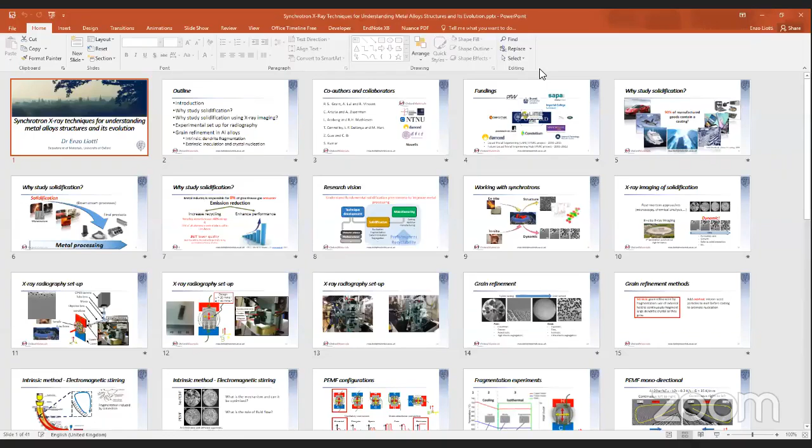In my presentation, I'm going to talk about the work we've been doing at Oxford using X-ray techniques to study metals, and in particular metal processing and the solidification of metal alloys.

I'll give you a bit of introduction about my background and the project, and also speak a bit about why we study solidification and why we use X-ray imaging to do that.

Then I'm going to move on and speak about the kind of experimental setup that we have developed to carry on these studies, and give you two case studies of the work we do, both on grain refinement of aluminium.

The first would be on what we call intrinsic grain refinement, which is dendrite fragmentation, and the second would be about extrinsic grain refinement, when you actually add seeds or a kind of nuclei to the liquid to get enhanced crystal nucleation.

The work I'm presenting has been done in collaboration with many people, and the main co-authors are Professor Patrick Grant, Andrew Liu, and Robin Vincent in my own department.

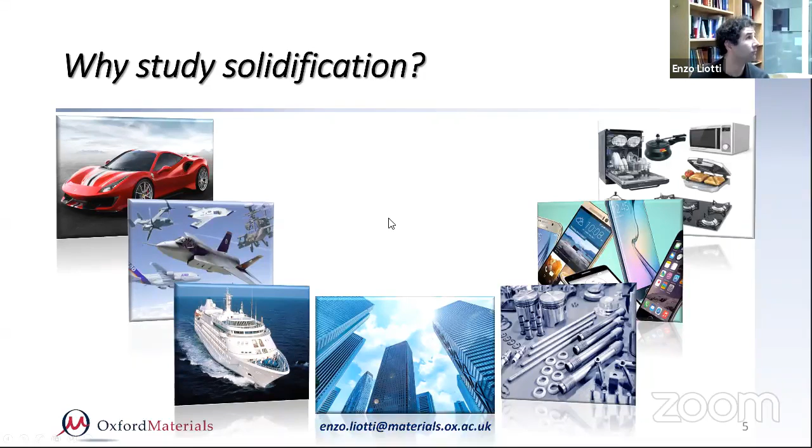So why do we study solidification? Well, if you look around you, any component or item you see probably includes at least one casting that has been produced through the solidification step. In fact, 90% of manufacturing goods contain at least one casting.

And also, if we look at the metal processing chain, we can see that solidification is almost always the first step of any component, and therefore the microstructure you obtain at the beginning will have a severe influence on the mechanical properties of the final product. So it's very important to get this right.

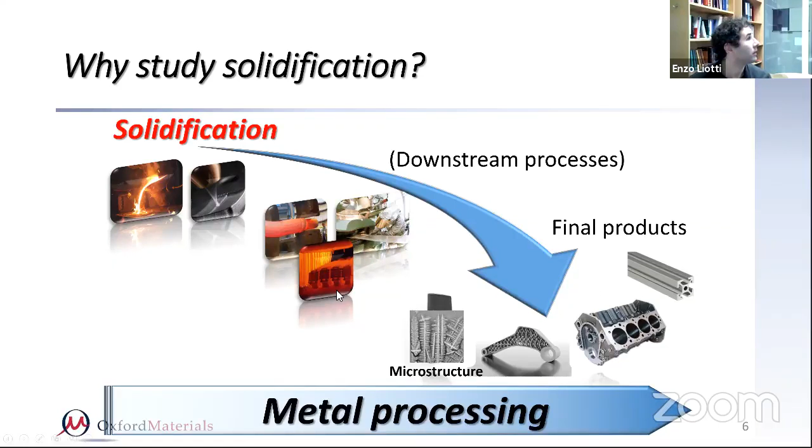The third reason why we study solidification is that if we look at emissions worldwide, the metal industry is responsible for 8% of greenhouse gas emissions. And to reduce this emission, we have to increase recyclability. This is quite interesting for metal alloys, because recycling aluminium saves 90% of the energy.

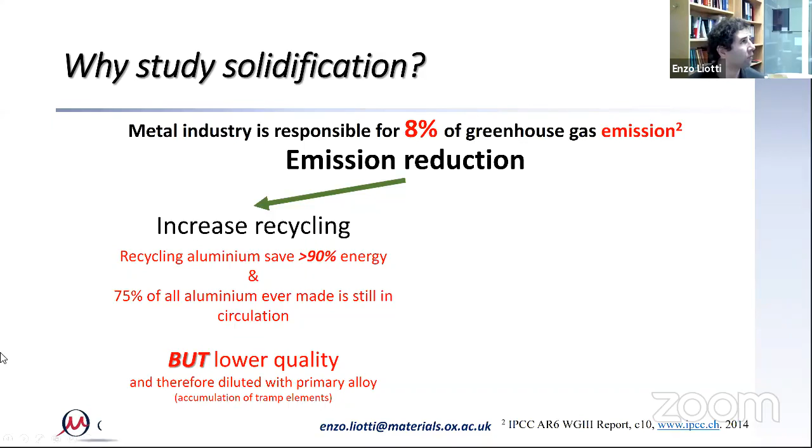That's not very big news. Also, 75% of the aluminium around is still in circulation. However, every time you go through the recycling cycle, the quality of the material decreases. Therefore, industry still dilutes secondary alloys with primary addition to bring back the quality to an acceptable standard. This has the disadvantage of needing to extract primary material to produce enough quality. So that's not a demand problem.

The second possibility is to enhance performance. Both of these criteria are heavily dependent on solidification. If you get a material with a very good microstructure with a lower level of defects at the beginning, then you will have better performance. And if you can control solidification wisely, you can probably reduce the need for diluting the alloy.

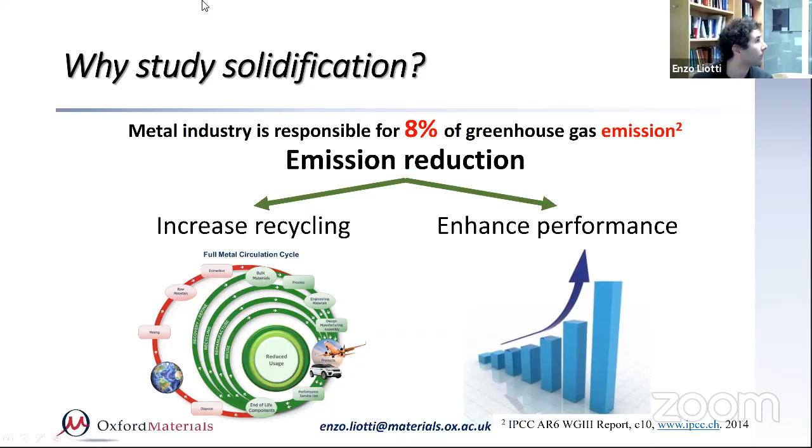So my research is focused on understanding the fundamental phenomena that take place during metal processing, to then enhance the quality of the material produced, and also learn how to control the microstructure to manipulate it to the needed requirement. I see my work as developing techniques that allow us to study solidification and improve manufacturing.

X-rays are very powerful tools for material scientists, especially for metallurgists. If we use a synchrotron, we can use X-rays to study the structure.

If we study the material ex situ, that's when you study the material at the final product. So for example, you do a casting and then you cross-section and look at the microstructure with microscopes. That's an ex situ experiment. So you do it after, right?

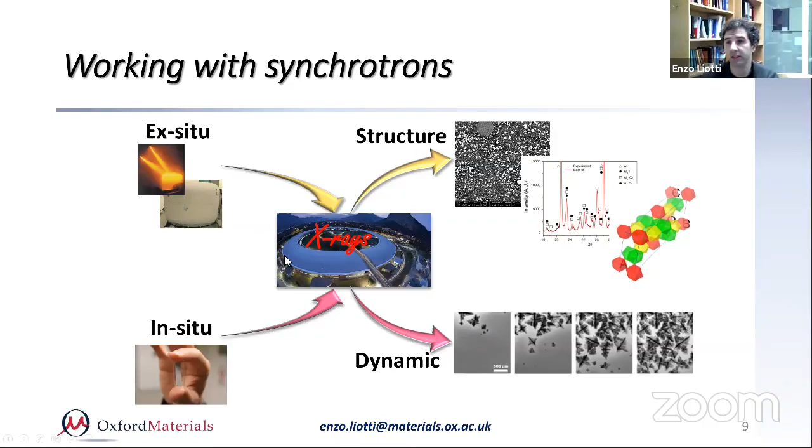When you're doing an in situ experiment, essentially it's when you're looking, for example, at a process while it's happening. That allows you to catch the dynamics of the process, which is very important, especially in very dynamic phenomena such as solidification.

Traditionally, metallurgy has been studied by post-mortem approaches. The typical case is what I just said: you take a sample, cross-section it, and look with an optical microscope or an SEM to see the microstructure. However, it doesn't actually tell you the entire story, because the microstructure you attain in dynamic processes is often the result of the process itself. So actually looking only at the final stage might not tell you the entire story.

Therefore, using in situ imaging with modern third generation synchrotrons, which are quite widespread nowadays on pretty much all continents, allows you to see the dynamics. By seeing the dynamics of solidification, you can learn about the nucleation and growth of the various phases, the solid-to-solid interaction, etc. It gives you a lot of information.

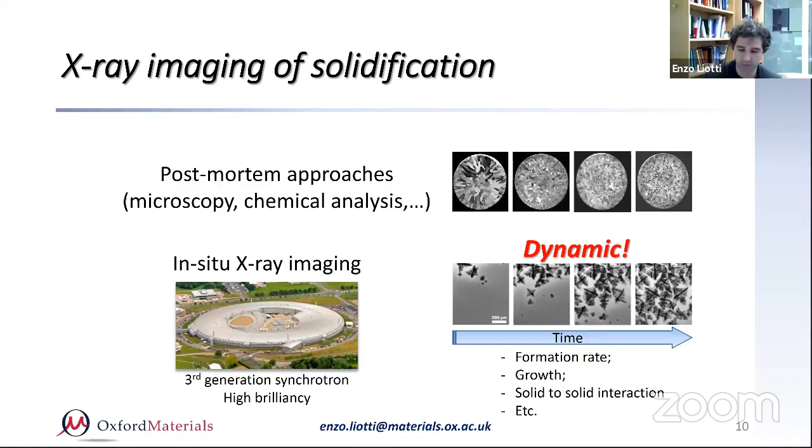So how does a normal radiography setup work? Normally you've got a sample, a very thin foil encapsulated in a container. In this case, it's a quartz-like cell, and then we put it in a furnace, which is a small Bridgman furnace.

A Bridgman furnace has two chambers that can be controlled independently. In this case, you see a heater on the top and a heater on the bottom, and they can be controlled independently. Because of that, we can impose an isothermal condition, or impose a thermal gradient and cool at a different cooling rate. By putting the sample in the middle, you can control the solidification.

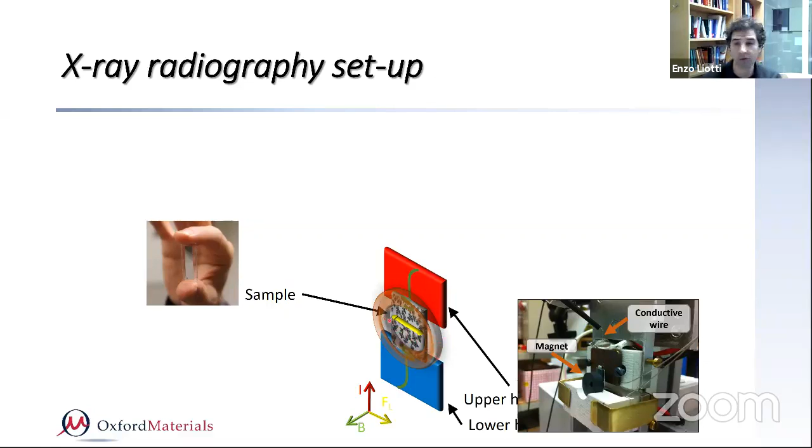Furthermore, our rig allows us to put a little electromagnetic stirrer that moves the liquid in the sample while imaging the formation of the dendrites or the solid. That's done by putting a small ring magnet and connecting two wires into the sample from the bottom to the top. By passing a current into the sample with the presence of a magnetic field, you can apply a Lorentz force, which is controlled by the type of electrical pulse you put in.

Then, as I said, you pass X-rays through your sample between the gaps in the two heaters, and you can collect the transmitted signal with an optical system at the synchrotron, which gives you an image that looks like this one. Okay, a few more details about the setup.

This is a detailed image of the sample. You can see the two wires here on the left, and the sample is covered by a coating, normally boron nitride spray powder, just to avoid contact with the silicon, which would basically dissolve the cell.

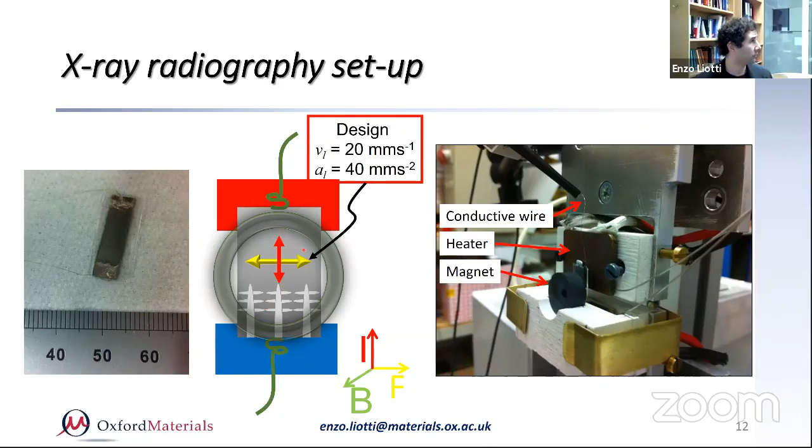Here is an example of how this little setup works. As I said, B is the magnetic field that passes through the sample. I is the current, which can be controlled because we use a pulse generator, so you can put different kinds of pulses in it. The yellow is the Lorentz force. In this case, if the magnetic field passes in the plane of the sample, perpendicular to us and coming out from the screen, and the current goes up and down in this direction, then the Lorentz force will be in the other direction.

These are a few examples of the rig setup during an experiment. In this case, the experiment was done horizontally, this was a thermal study, and this is a setup at the synchrotron.

As I said, the example I'm going to speak about is grain refinement. A typical casting has a coarse, columnar, anisotropic microstructure, and we retain normally high macrosegregation. That's what happens if you try to cast a component and don't do anything. Just pouring the liquid metal, the columnar microstructure tends to be favored.

What you really want to obtain naturally is a grain refined microstructure, so an equiaxed, fine, isotropic microstructure. We retain little macrosegregation, and it looks like this. This is the macro scale, and this is actually the small dendrite.

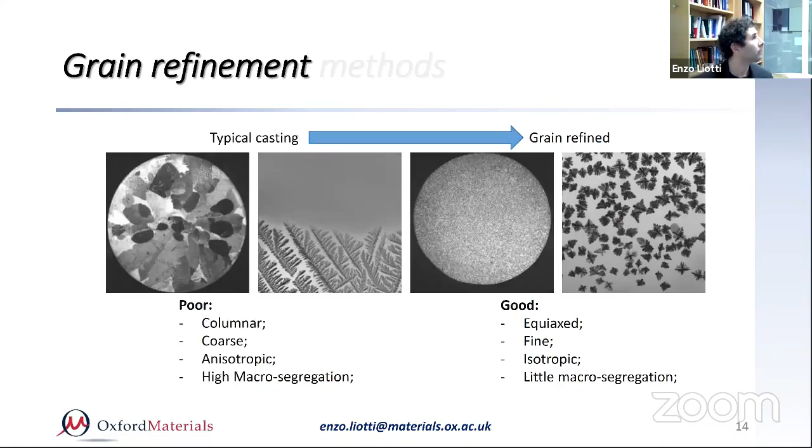To grain refine an alloy, you can use an intrinsic method, such as grain fragmentation. It's intrinsic because you're not adding anything to the material, but essentially using an external field to continuously disrupt the growth of the columnar dendritic array. That disruption and breaking of these arms generates new crystals as they grow and grain refines the material. The extrinsic method instead is when you add micron-sized particles to the melt to promote nucleation. A typical case in aluminum is the addition of TiB2.

The first example would be regarding intrinsic grain refinement. This method is already in place, for example, in continuous casting, where along the curve there are several electromagnetic stirrers, normally 2 or 3. If we look in detail, we can see that essentially the electromagnetic stirrer, whose primary goal is to homogenize the liquid and avoid or diminish macrosegregation.

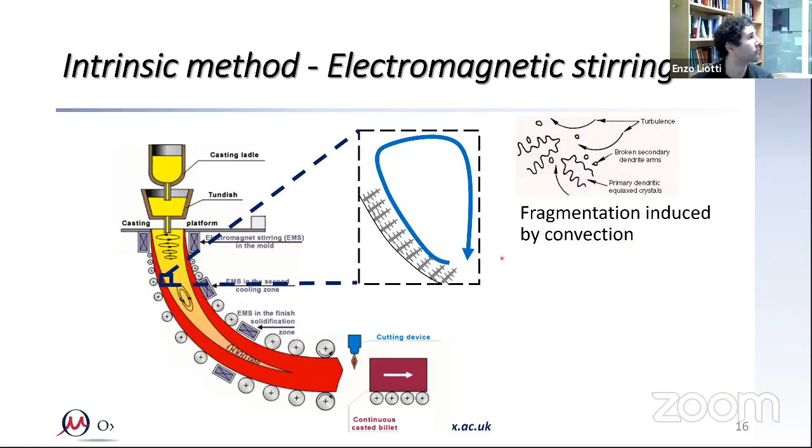But also the stirring leads to the fragmentation and breaking of the dendrite arms, promoting an equiaxed microstructure. This is an example of the effect of adding magnetic stirring to an iron and steel sample, and you can see with and without the PEMF in different conditions.

So it is known that if you stir the sample, you enhance the formation of an equiaxed microstructure, but what is the mechanism, and can it be optimized? What is the role of the fluid flow? Is it just mechanical breaking, or is there another mechanism? And can we exploit it more?

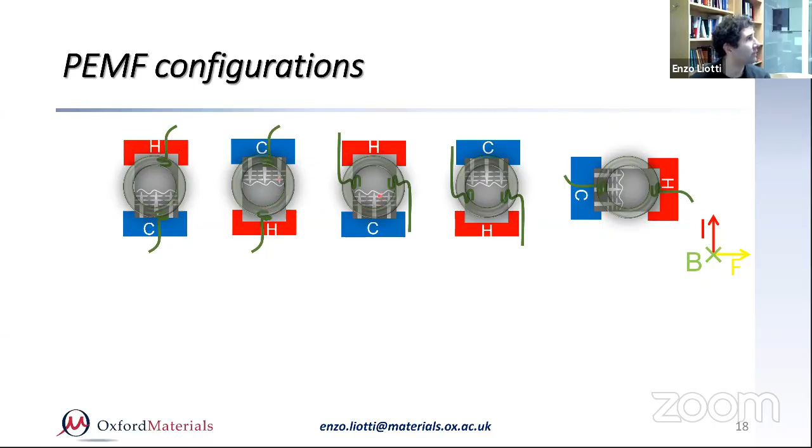With our little rig, which I showed before, we could essentially have several different setups. Because we can control the temperature of the two heaters, we can do solidification from bottom to top, or top to bottom. Also, by putting the wire in different locations, we can stir the liquid in different ways. If we put the wire at the top and bottom, we stir the liquid horizontally compared to the growth direction of the dendrites. Otherwise, we can put the wire on the left and right and stir vertically. We can also tilt the rig.

Also, the pulse can be oscillatory, like a sinusoid, square, or triangle, but can also be monodirectional, so always positive or always negative pulse, again with different shapes. So it's a very small setup that allows us to test many conditions.

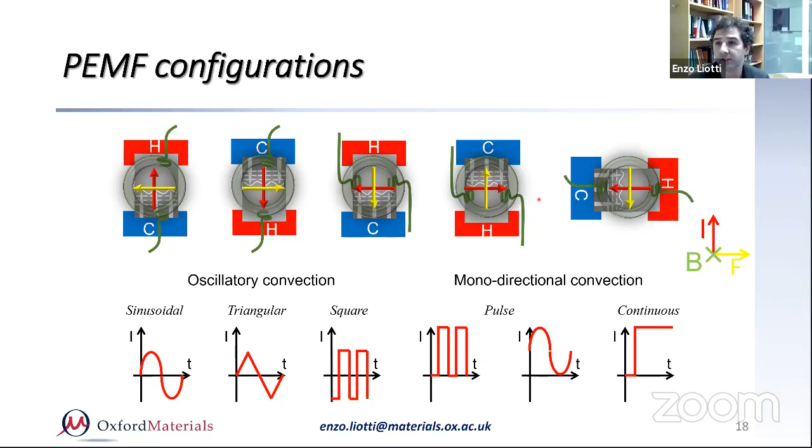The one I'm showing first is an example of a monodirectional, continuous, and sinusoidal oscillatory case. The type of experiment we were doing, which we call the fragmentation experiment, had this kind of setup, where we were cooling by imposing a thermal temperature gradient in the liquid. The material starts as liquid, then we cool at a constant cooling rate, with both heaters at the same cooling rate, until the dendrites were growing in the middle of the field of view, as you can see here. Then, at some point, when everything is steady, we switch on the electromagnetic stirrer.

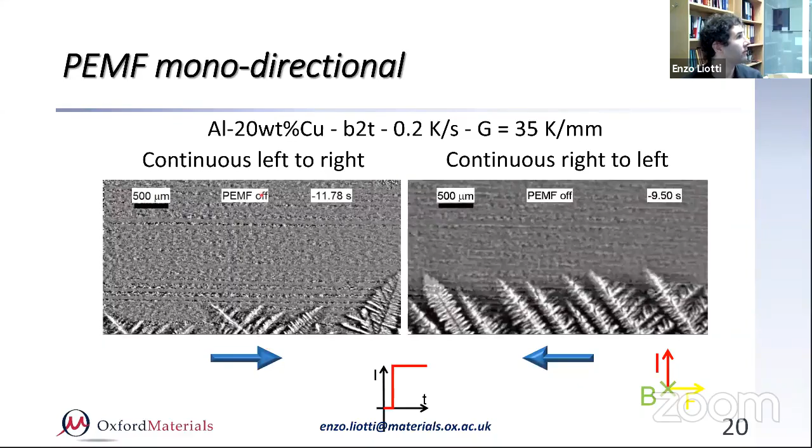So what you see here is an example of the growth of a columnar dendrite, where there is a continuous electromagnetic field. You see the dendrite growing, right? At some point the PEMF is still off, and at some point it will be turned on, and you will see that essentially this is pushing this direction, and you see it's remelting this direction, and here is remelting here, right? And this, in this case, because it's continuous, it's almost a steady state.

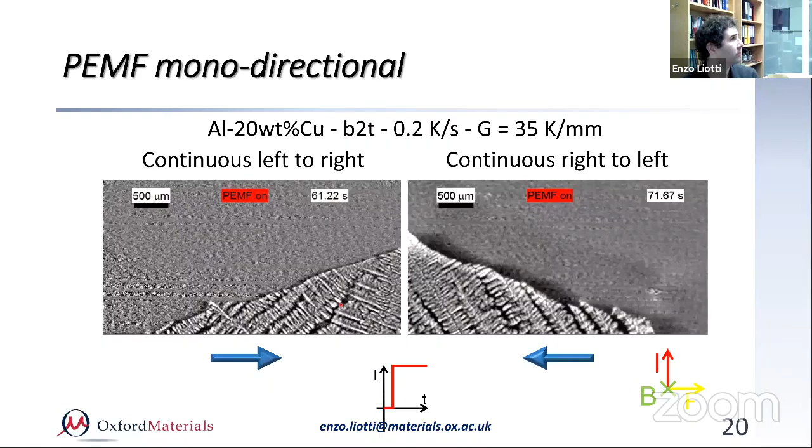The interesting thing is that you are remelting the top, but if you look carefully inside the mush zone, not much happens. So this condition, in essence, doesn't really lead to fragmentation. It just leads to a kind of steady state flow that makes the liquid recirculate and remelt the material.

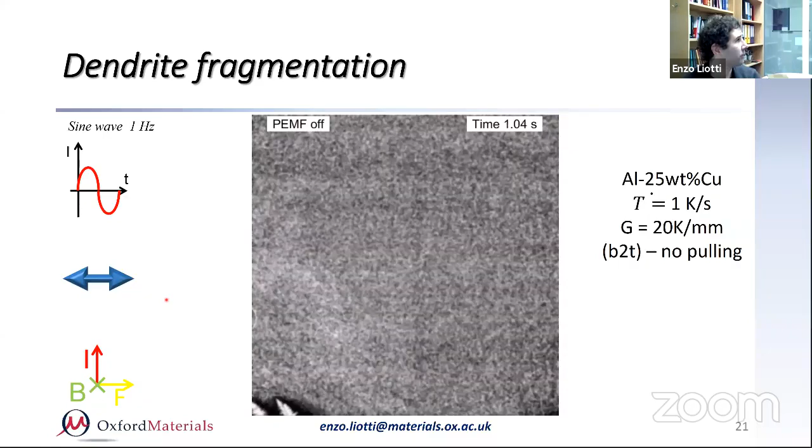This case instead is an oscillatory case. So what happened is the dendrites are growing, and here we are using a sine wave of 1 Hertz, which is positive and negative. So the liquid is steered left and right, and the dendritic array is growing. And if we go at time around 30 seconds, the PEMF will be turned on, and you will start to see fragmentation taking place.

It's about 32 seconds. This was grown like an aluminum copper alloy, and you can see, if you look carefully, we are steering the liquid. Clearly you don't see very well the liquid steering because you can't really see the flow, but you see the effect. So you see that there is a lot of secondary arms that are breaking.

And of course, in this case, because it's static, they just are basically stuck in the mush zone. But equally, they are breaking. So you can see, and if we speed up this process, I'll do it.

So you can see when it's like this, and they're moving with the flow. So it's a sinusoidal wave of 1 Hertz. So we are moving and steering the liquid on purpose. And you can see that it's taking primary, secondary arm, tertiary arm, breaking anything. And remember that in the mush zone you've got the liquid, and we are steering that liquid as well.

So we are here, and I sped it up so it's a bit more frequent. You can see that it's very noticeable, and you've got a lot of this breaking.

So we carried out a lot of experiments, more than 300 solidification experiments like the one we have shown you, with different kinds of setup, like bottom to top, with and without the EMF, top to bottom, and then one with vertical steering, and even horizontal solidification. But in the presentation of today, I'm focusing on the first four, so the bottom to top and the top to bottom case, with and without the presence of steering or electromagnetic steering.

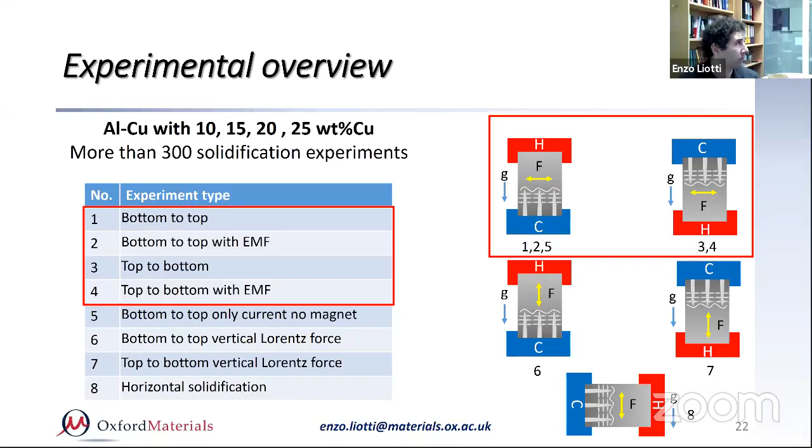So this is an example of the difference of the growth direction. So these are two arrays which are equivalent in everything apart from the direction. So when the PEMF starts, you can see that at some point there are, when you see the yellow, there is actually a breaking, right? And normally breaking doesn't take place immediately. It takes always a bit of time, about a few tenths of seconds. And you will see that when they start to basically fragment, there is normally more fragmentation in the bottom to top than in the top to bottom.

And if you can notice, actually, the top to bottom dendrites are almost oscillating with the flow. So there is a sine wave of 1 Hertz, as you see, and these dendrites are actually like if they were trees in the wind. Again, I'll speed it up a bit so it's a bit clearer. You see that the fragmentation is incrementing. And if I go fast, you can see there is a lot happening in the bottom to top, so the video on the right, and not very much in the other one.

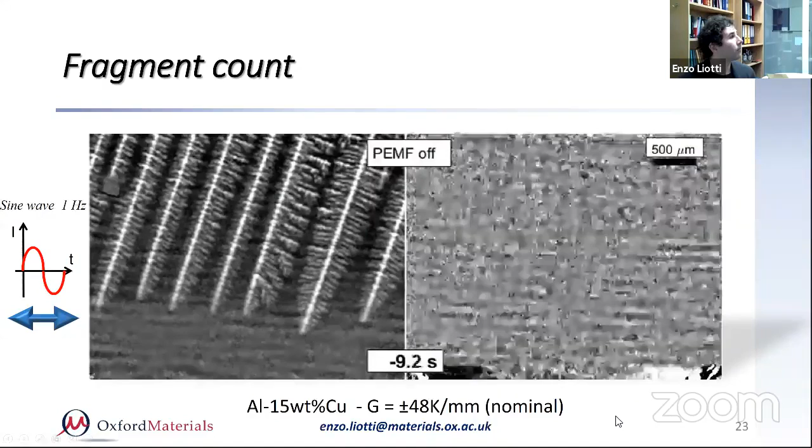Right. So what happened is this is actually the fragment count. So if divided in time steps of 30 seconds, right? And there was, this is on the left here, you find two videos, that is the top to bottom and the bottom to top.

And that's actually as time passed, so you should look at it horizontally like that. And you can see that the case at the bottom to top is significantly higher than the other case.

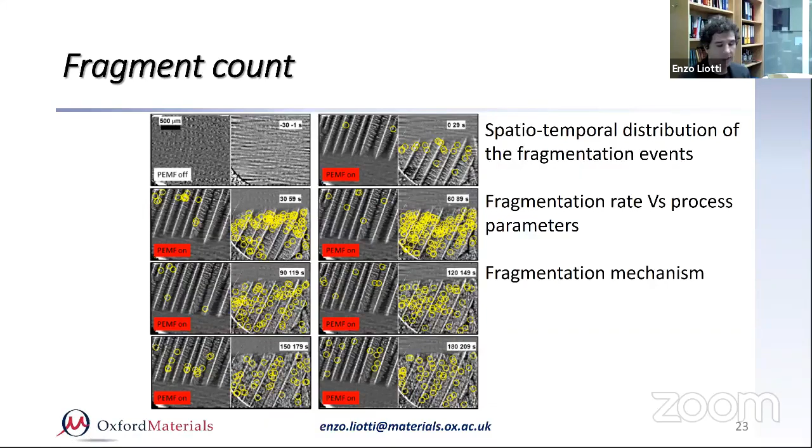In fact, the other interesting thing is the distribution of breaking events, the information we could learn about this, and the fragmentation rate against the processing parameter. What we were trying to achieve was to understand the fragmentation mechanism. By analyzing 39 video sequences and counting pretty much 8,000 fragmentation events, we were able to produce this curve, the fragmentation rate as a function of time for the various cases.

There are basically two reference cases for the bottom to top: the bottom to top where we're not doing anything, not steering, shown in green, and the red one, which is the bottom to top when we were steering, and then the same for the top to bottom. We used two different strengths of the magnetic field, so like more force.

If we compare the top to bottom with the bottom to top, this graph A shows the ratio of the fragmentation rate of the top to bottom compared to the bottom to top. We see that essentially solidifying the material with growth from the bottom to top was always favored. The fragmentation rate was higher at any time during the experiment.

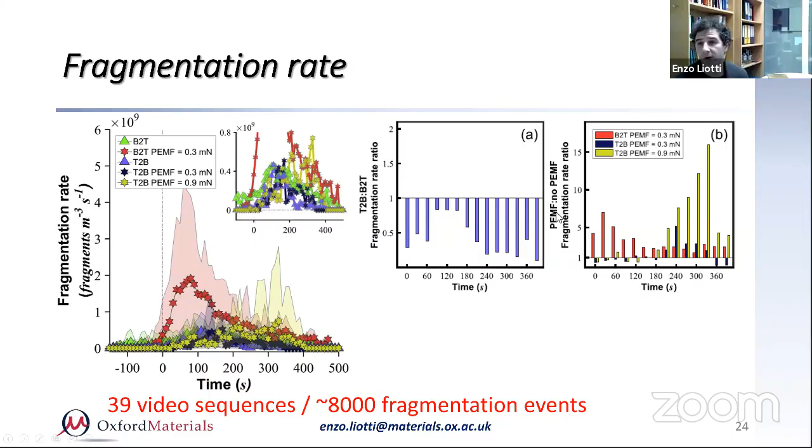While equally, every time we use a magnetic field, we obtain more fragmentation than without it. So the bottom to top is always higher than the top to bottom, and so it was when the electromagnetic steering was present compared to the case without.

The other thing that was interesting is the distribution of the fragments within the mushy zone. Somebody would expect that most of the fragmentation takes place at the tip, within the tip region. Actually, we found that there was almost a log normal distribution.

In all the experiments, fragmentation takes place more or less to a depth of a few hundred microns in. The peak is always the same, and that is independent from the top to bottom or bottom to top. So that tells us something about the mechanism.

Also, we started to look inside the mushy zone, at how the distribution of the solute gradient is. If the mushy zone is like this, the one in the image in the center, the solid fraction is 0 at the top and then will increase going down, right?

And we measure the solute gradient. So by looking at the images in the liquid and measuring the concentration of the liquid within the interdendritic channel, we were able to measure the solute gradient as expected.

The solid fraction increases, but also this horizontal gradient, which is actually represented by this color map, increases as you go deeper in the mushy zone, as shown here.

These are individual measurements of the solute gradient in the horizontal direction as a function of depth in the mushy zone. Here it shows the fragmentation of a primary dendrite, and you can see that the gradient was very high in the local area nearby the break.

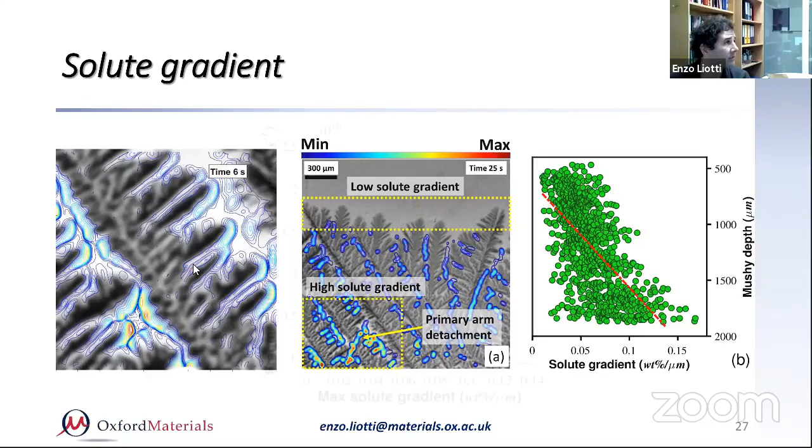So what this is telling us, well, when we started to look at and compare the fragmentation rate with the solute gradient, we found a correlation. This is important to understand the mechanism. So the higher the solute gradient within the liquid, the higher the fragmentation rate.

And the explanation we look at is this kind of mechanism. You need three fundamental key aspects to fragment a dendritic array. The first one is that you need a solute gradient. So if you are in an interdendritic channel, and this is a schematic of a primary and secondary arm, you've got some vulnerable regions, which are regions of high curvature, essentially the neck of the secondary dendrite where they are attached, and also primary kind of thinner areas.

And also you've got a solute gradient in the channel. So if the concentration of the solute would be flat, then even if you destabilize, if you move the liquid, nothing would really happen. If you've got just a little bit of concentration gradient, then the effect of destabilizing this vulnerable region would decrease.

But if you've got a steep concentration gradient, then the effect of a destabilization force, which could be our electromagnetic stirring, is increased, and therefore you've got more chances to break out.

This vulnerable region. So to summarize, what you need to enhance fragmentation is a growth condition that favors the formation of this vulnerable region, that favors the formation of high curvature areas. And also you need a destabilization force, and you need quite a steep solute gradient within the mushy zone.

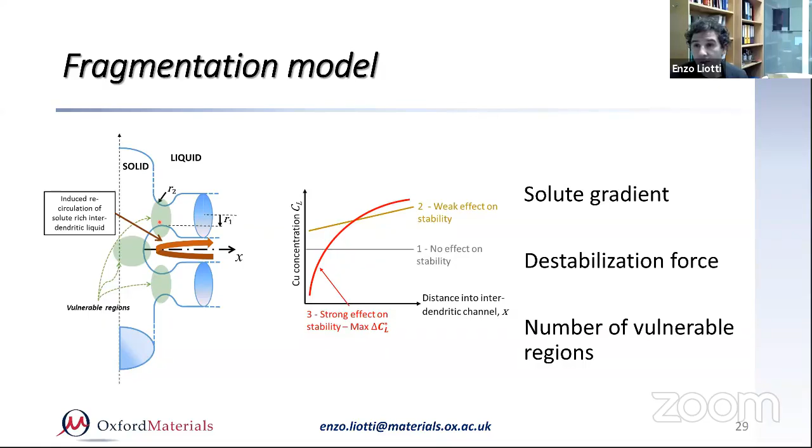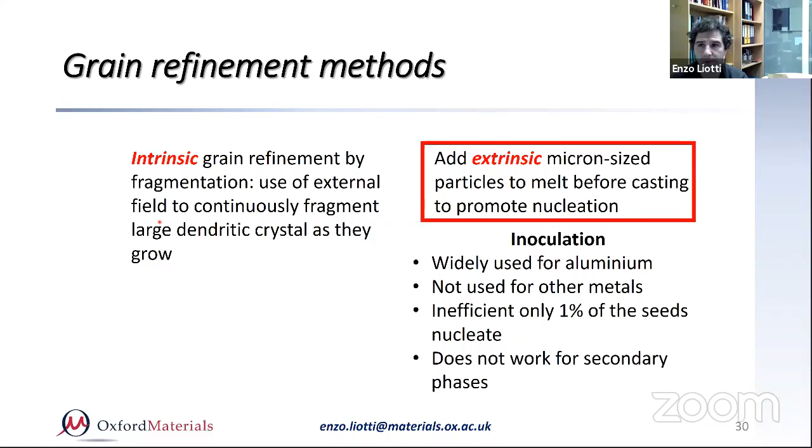So here is an example of nucleation of aluminum alloy from the liquid. What I'm going to show you is three video sequences of the solidification of an aluminum 20% copper, which was grain refined with TiB2. The difference in the three videos is just the cooling rate. So from the left is 0.3, and the one on the right goes up to 1.5 degrees a second. And these were solidified near isothermally with the two heaters kept at the same temperature and grow horizontally.

You can see that the grain forms, and the one on the right is faster, so they appear in the field of view much faster. But also qualitatively, you can see the solute segregation, in the mush zone, the darker blue color, compared to the bulk liquid. But one thing that's immediately visible is that despite the fact that it takes less time on the right side to solidify, just from the cooling rate, you can see that the nucleation was more copious. In fact, if we go towards the end of the video, you can see that the grain size, even by eye without any measurement, is much smaller on the right than on the left. That's kind of known: if you increase the cooling rate, you increase the nucleation rate, and you get a smaller grain size. So that's so far so good.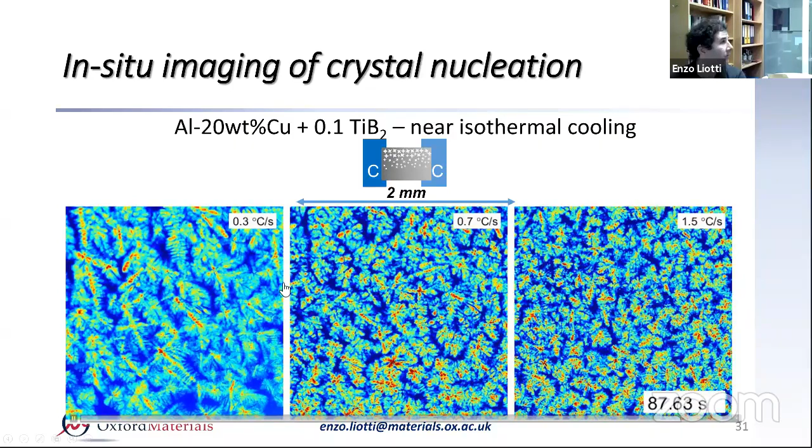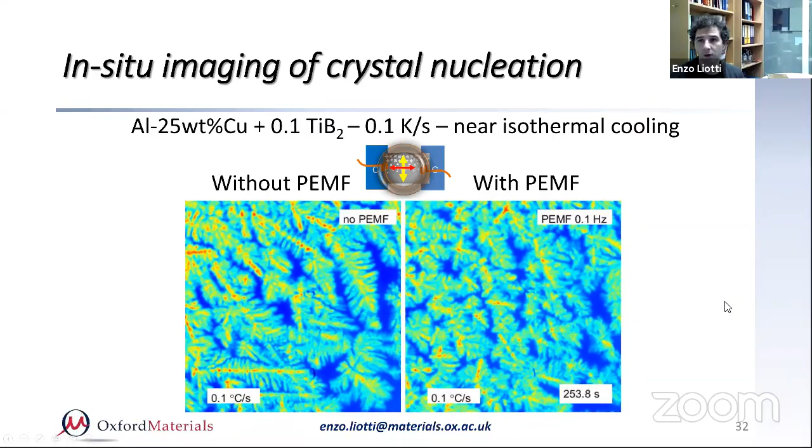Bear in mind that the PEMF is not always effective. It depends how it's applied. So in a complex casting, this situation will be much more chaotic.

Again, we've done many of these experiments. We spent 55 days at the Synchrotron, using different synchrotrons here in Europe, in Switzerland, in the UK, and in France. And we managed to collect 1,400 experiments, all on aluminum copper with different solute content, with and without the grain refiner, with and without stirring. And we covered a wide range of solidification conditions. That accounts for more than 50 terabytes of data, which is more than 10 million images. Most of these experiments were of very good high quality, like the video, like the image you see on the left.

You could actually get a lot of information out of it if you could analyze it. By counting the grain, you could estimate the formation rate and learn about the efficacy or potency of grain refiner particles. You could quantify the growth rate if you measure the elemental field in the liquid, since the experiment allows you to get a concentration of the solute in the liquid phase, and also get information about fluid and grain flow if you can track the grain. If we got all this information, we could compare it with nucleation and growth theory and test their validity, as a function of all the solidification parameters.

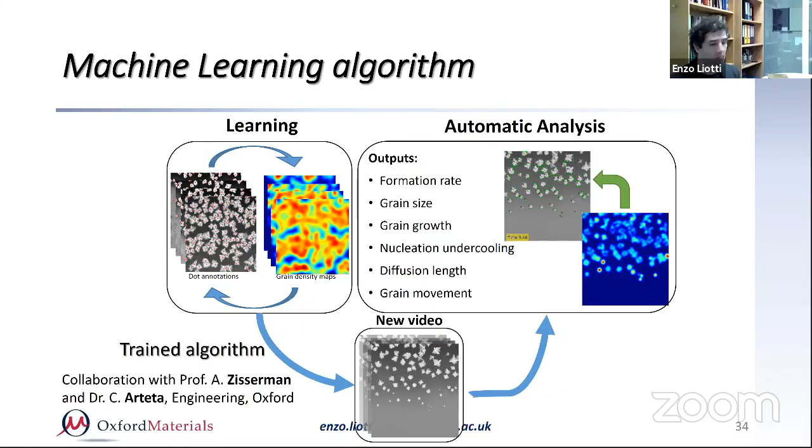And then we used that detection algorithm to attach a measurement algorithm. So once the grain was detected, another part of the algorithm automatically measured the grain size, formation rate, grain growth, nucleation undercooling, diffusion length, grain movement, and more. Here is an example of the algorithm at work.

You can see the dendrites are growing and it's detecting the velocity, so you can actually see movement and velocity. It's also detecting the grain as they form and tracking their growth.

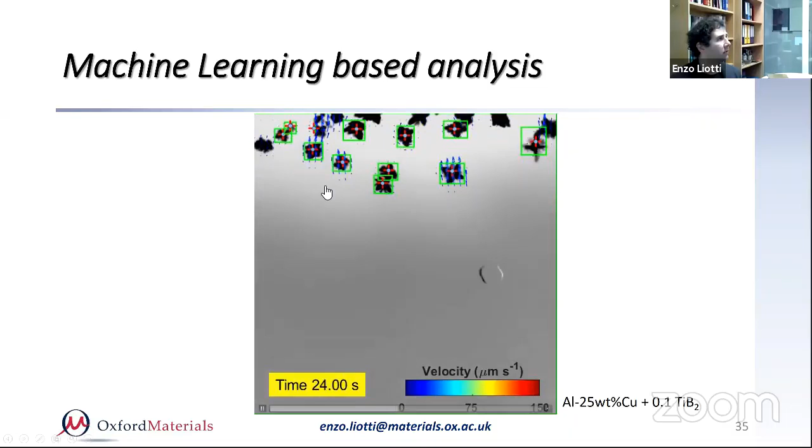This was done so far for 140 of the experiments we performed, out of 1,000 and something. You can see that they rotate and move. By measuring 128 video sequences, we were able to detect 14,000 separate nucleation events, each corresponding to an individual dendrite, an individual equiaxed grain.

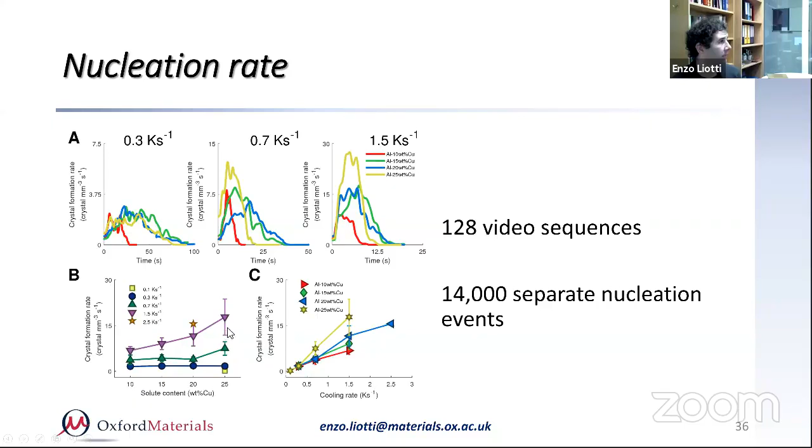That's also seen here in figure B, where you can see that essentially the effect of the cooling rate was much more effective at high solute content compared to low solute content.

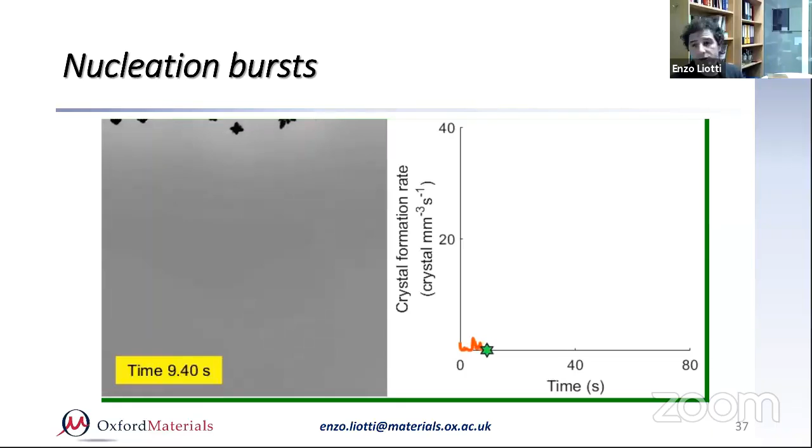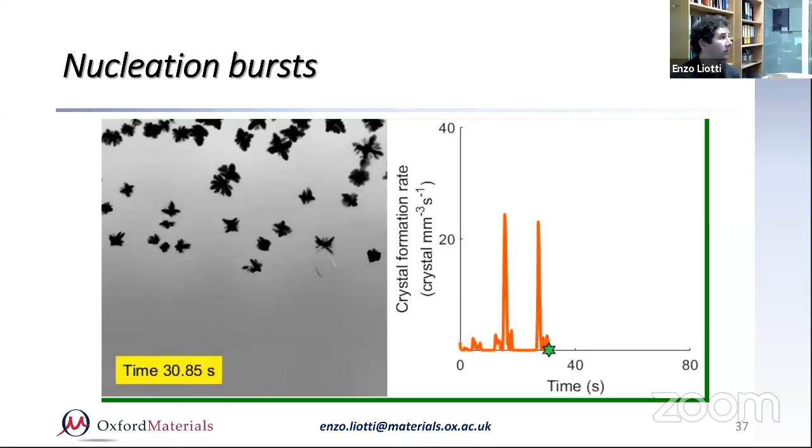Another interesting aspect found by analyzing all this data, which I had always theorized, is that nucleation in a temperature gradient doesn't take place continuously, but actually comes in bursts. As you can see here, this is a live graph of the formation rate of the crystals, and within the video there were essentially 2 big waves. So nucleation is not continuous, it's almost like recharging, and then there will be a final wave taking place now.

This was crucial to understand the way in which nucleation takes place and how it might be controlled. In fact, by looking at the video, we were able to correlate the frequency and intensity of these waves to the concentration of the solute.

So when we have more solute, essentially these bursts are more frequent, so they take place at a higher frequency and they are more intense. The effect of solute is that when you have a low solute content, nucleation is almost continuous, happening infrequently and slowly. But the more solute you put in, you favor the formation of a solid suppressed zone, and therefore when nucleation takes place, it happens in the form of a wave, a burst.

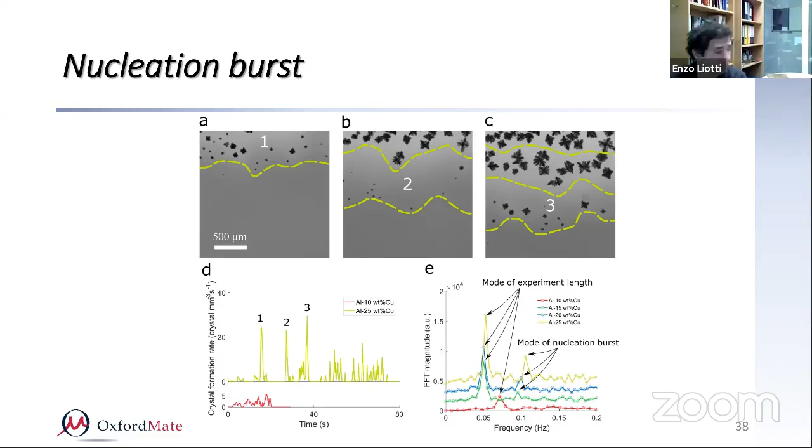This was explained by looking at the effect of solute suppression. Solute suppression is a concept showing that by increasing the solute content, you increase the size of the solute suppressed zone, which takes place because of partitioning.

When a solid forms, it will segregate. In the case of a hypoeutectic aluminum alloy, it will segregate solute into the liquid. In a hypereutectic alloy, it's the same, depleting the liquid of solute. The blue area you create is a zone where nucleation cannot take place because it's been suppressed by the solute rejected by the solid crystal.

If this area is large compared to the overall undercooled area, then when nucleation takes place, it happens at higher undercooling. The schematic shows that you're able to activate more grains when you suppress more solid, because you suppress the easy-to-nucleate grains that would otherwise kill the nucleation of higher undercooled seeds.

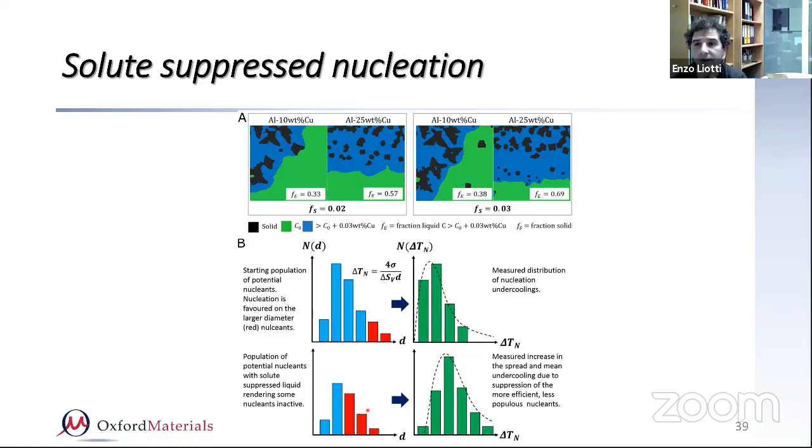With this, I conclude my talk. The takeaway is that X-ray imaging can give you the dynamics of the phenomena, which is key to understanding fundamental phenomena during solidification, or any other dynamic processing phenomena. It has become an almost indispensable tool for studying solidification, as shown by the increasing number of studies of this type published in the literature.

And that's also because the number of synchrotrons offering an imaging beamline is increasing, so more people have access to these tools.

These techniques have given new insight in science, especially new types of data that weren't available otherwise. The bursts of nucleation were hypothesized back in the early 2000s, but this was the first direct evidence that they existed.

The interesting thing is that it's now relatively straightforward to do this experiment, but it needs automated analysis to be fully exploited, especially machine learning, because of the sheer size of the dataset created. It's unthinkable to approach manually.

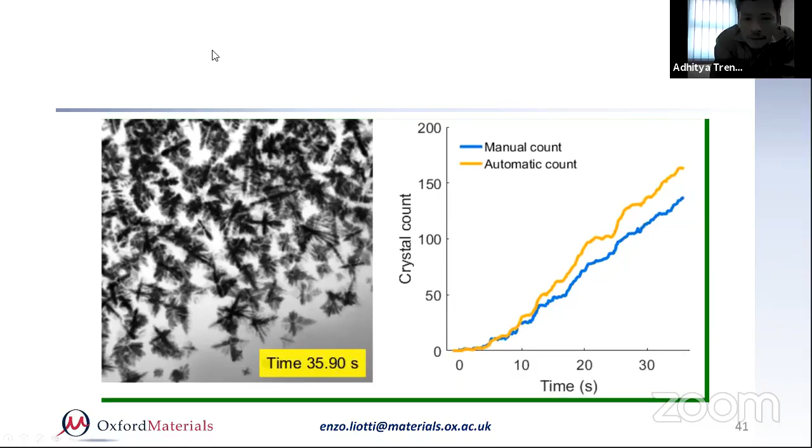Before we close this first session, I want to ask Dr. Enzo, do you know Mika Filipa from Portugal? No, I never met him. Yeah, nice to meet you. Okay, so because I checked your Facebook and you are friends with Mika Filipa from Aveiro, Portugal. Oh yeah, yes, I know her. She's my friend because I got my master's degree at Aveiro University. Really? The world is very small. Yeah, Mika used to be my housemate for a long time, in Oxford. That's a very small world. Yeah, that's very interesting.

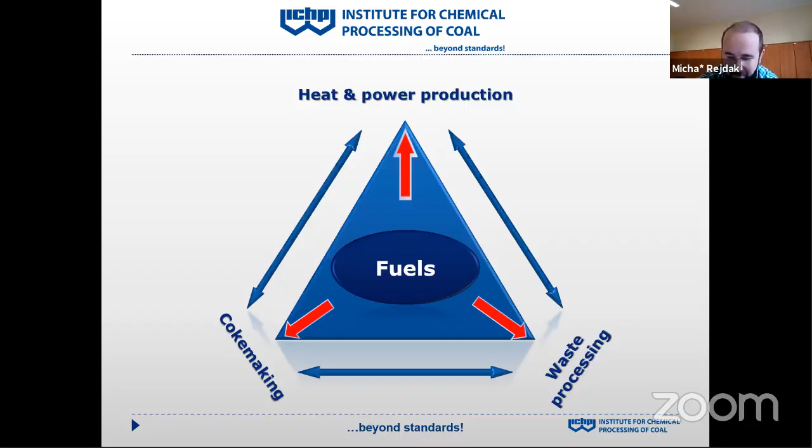Okay, so hello once again, good afternoon ladies and gentlemen. First of all, I would like to thank Sultan Ageng Tirtayasa University for the possibility of making this presentation. My name is Michal Rejdak, and I am an employee of the Institute for Chemical Processing of Coal. Our headquarters is located in Zabrze, in the Silesia district of Poland. We are a research institute focused on development of technology related to coke making, power production, and waste processing. Today, I have the pleasure of giving a lecture entitled Cokemaking Technologies, in which I'll try to present matters related to the technology of coke production, which is an important raw material for the development of the world economy. There is an agenda for the presentation.

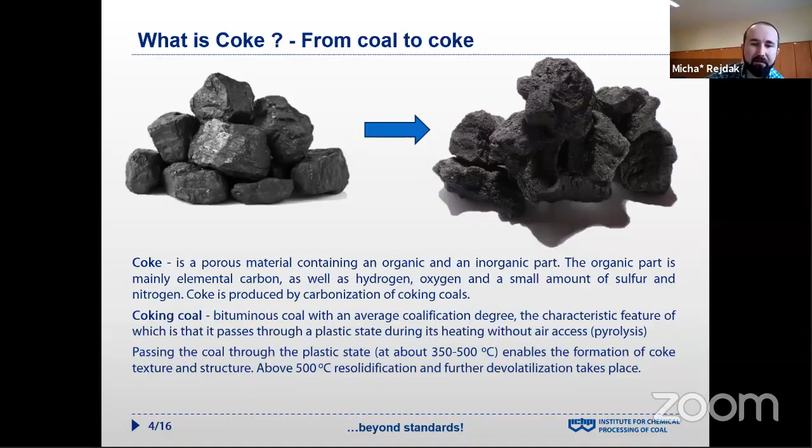In general, I will try in a brief way to approach the process of coke production. What is coke? In general, coke is a porous material containing an organic and inorganic part. The organic part is mainly elemental carbon and also hydrogen, oxygen, and a small amount of sulfur and nitrogen. Generally, coke is produced by carbonization of coking coals in coke oven batteries. What is coking coal? Coking coal is a kind of coal, a bituminous coal with an average coalification degree, and the characteristic feature is that it passes through a plastic state during its heating without air access.

It's called the pyrolysis process, and passing the coal through the plastic state occurs at about 350 to 500 degrees Celsius, which enables the formation of coke texture and structure. Above this temperature, in general, resolidification and further devolatilization takes place. There are generally three main types of coke produced: blast furnace coke, the production of which accounts for over 90% of global production; foundry coke, used for iron and steel foundry, casting of non-ferrous metals, and manufacture of insulation products like mineral wool; and heating coke, used for heating purposes as a smokeless fuel.

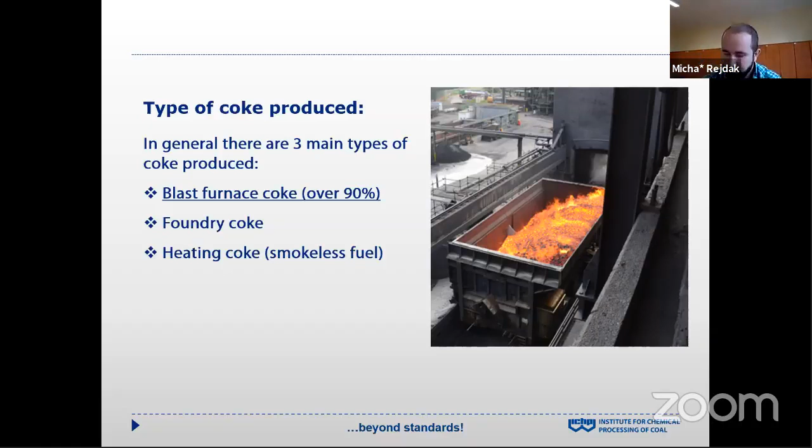As you probably expect, the largest coke producer is China, which produces over 400 million tons of coke annually. Other largest producers are Japan, about 30 million tons of coke per year; Russia, more than 28 million tons of coke per year; and India, just over 20 million tons of coke per year. In the European Union, the largest producers are Poland and Germany, with production of approximately 9.5 million tons of coke per year.

The production of coke is closely related to the production of steel, the basic raw material necessary for the development of any economy. Steel is used in the construction industry, automotive industry, household appliances, and many others. It is currently the basic construction material.

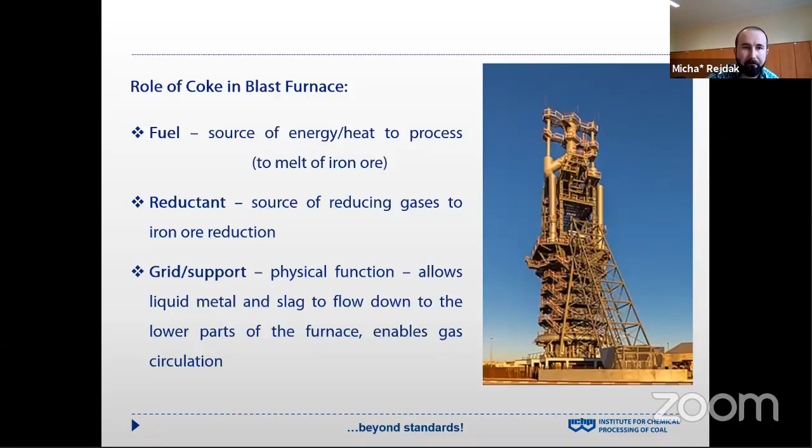Gases generated during the process remain in counter-current to the downward sliding column of materials. At the bottom of blast furnaces there are hot blast nozzles. The oxygen in the air, on contact with the coke, generates carbon dioxide.

Then the carbon dioxide, on contact with the hot coke, produces carbon monoxide. In the Boudouard reaction, the carbon monoxide produced this way is the main reducing gas for the reduction of iron-bearing ores to liquid iron.

Due to the difference in density, because apart from iron, some slag is being created during the blast furnace process, the liquid iron flows to the bottom of the furnace, while the slag is on its surface, from where it is drained out.

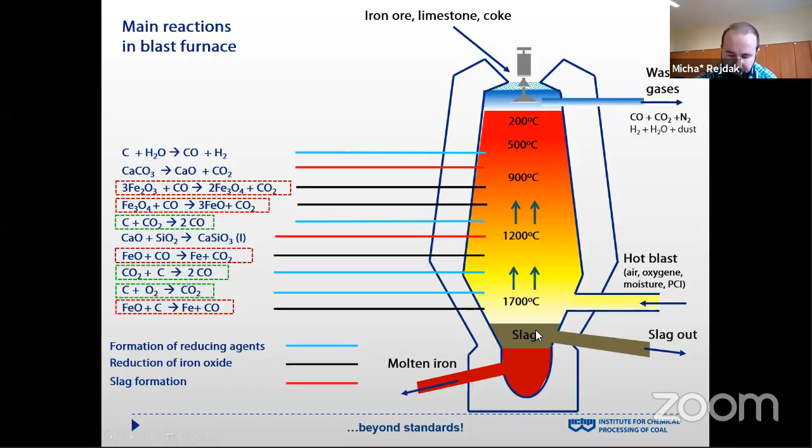In modern blast furnaces, in addition to coke, alternative fuels such as pulverized coal or natural gas are used as a heat source. Moreover, modern furnaces are taller and have a greater working volume, related to the higher mass of input material. Therefore, the physical role of coke is increasing in importance - that is, providing a grid for the columns of material and the gas permeability of the bed.

In several previous slides I tried to show how important coke is in the production of steel. In the following, I'll try to present the method of producing coke in the coke-making industry.

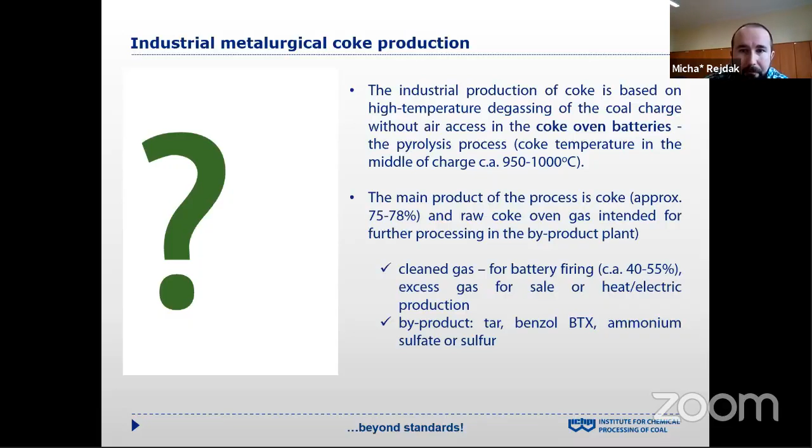The industrial production of coke is based on high temperature degassing of the coal charge without air access in coke oven batteries - it's called the pyrolysis process. Coke temperature in the middle of the charge, in the middle of the oven, is between 950 and 1000 degrees Celsius. The main product of the process is coke.

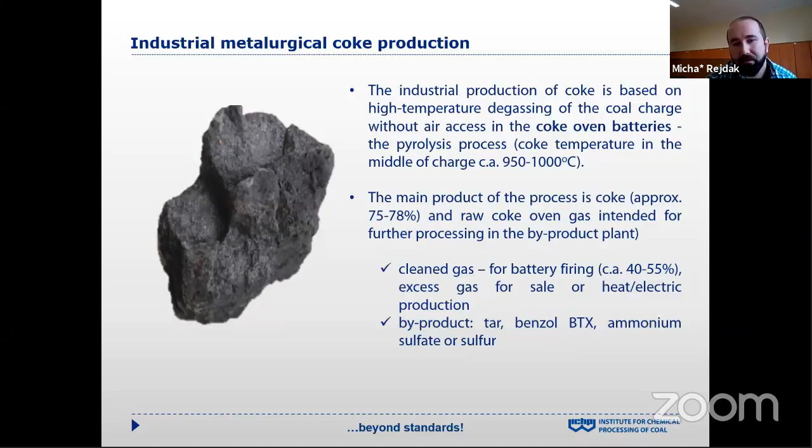Coke makes up approximately between 75 and 78%, and raw coke oven gas, which is intended for further processing in a byproduct plant, is used to obtain cleaned gas for battery firing - about 40 to 55% of cleaned gas is used for battery heating, and the excess gas can be sold or used for electricity production. Apart from coke, we have byproducts like tar, benzol - which contains benzene, toluene, or xylene - ammonium sulfate, or sulfur.

We can generally distinguish two types of industrial coke production technology: coke production in batteries with or without recovery of byproduct, so-called non-recovery or heat recovery batteries.

Depending on the methods of loading the coal charge into the battery, each of these technologies is divided into two: top, sometimes called gravity charged, and stamp charged technology. The main difference between the two is the recovery of byproduct from raw coke oven gas. In byproduct coke making, the raw coke oven gas passes through the process system to recover a number of valuable chemical products. But in non-recovery or heat recovery, the gas is only used to heat the battery and produce heat or electricity.

In the case of a gravity charged battery, the coal blend is gravity charged into the coking chamber from the top of the battery through the charging holes located in the battery roof. In the case of a stamp charged battery, the coal charge is first compacted in a steel box by a row of stampers, and in the form of a stamped coal cake, it is pushed into the oven chamber through the oven door, which is located on the machine side of the coke oven battery.

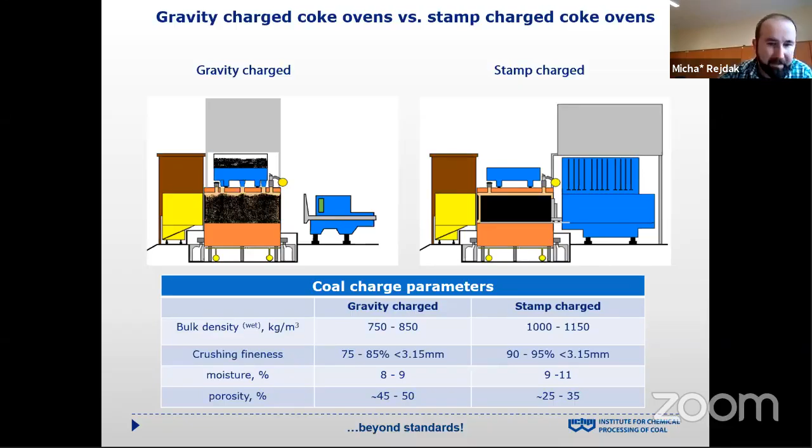We can observe that in both cases we obtain different parameters of the coal charge for coking. Thanks to the stamping process, we obtain a much higher bulk density of coal charge, which enables the production of better quality coke, or production of coke of the same quality but with use of weaker and cheaper coals in the coking blend, sometimes even non-coking coals. But the use of stamp charge technology requires deeper grinding and higher moisture content of the coals to ensure proper stability and mechanical strength of the prepared coal cake.

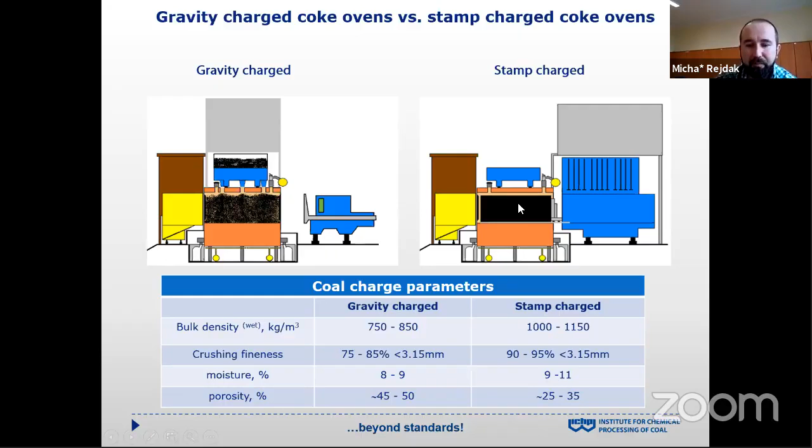What is the advantage of stamp charging? As I said before, the higher bulk density of coal charge enables production of coke with higher coke strength after reaction index and lower abrasive index. I mentioned lower cost of coking blends, and of course higher density is related to higher oven throughput. But about the coking quality parameters, I will say in the next slides.

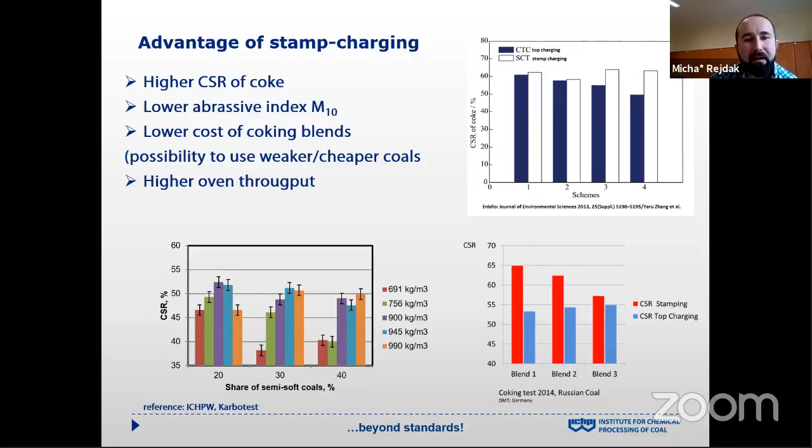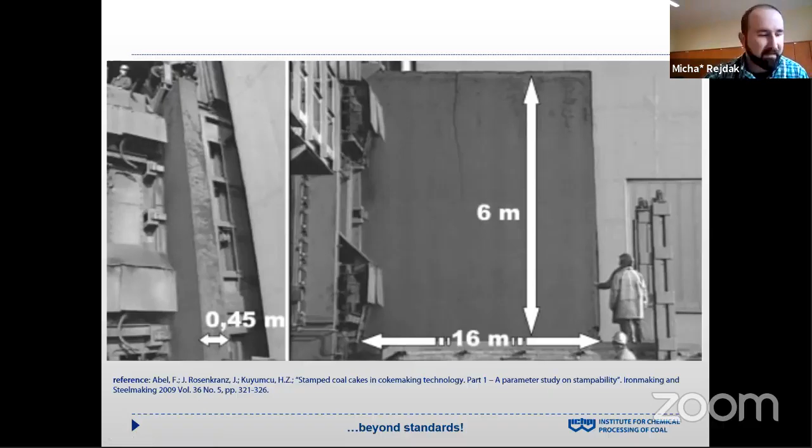In the next photo, we can see the stamped coal cake. As we can see, the height of the cake is about 6 meters, the width of the cake is 45 centimeters, and the length of the stamped coal cake is 16 meters.

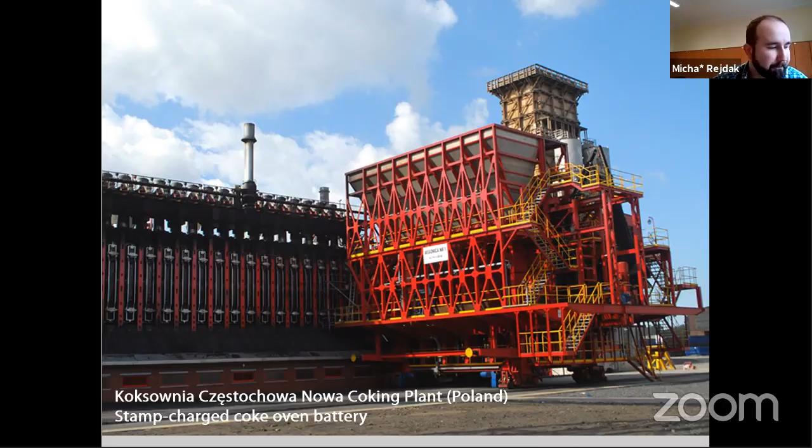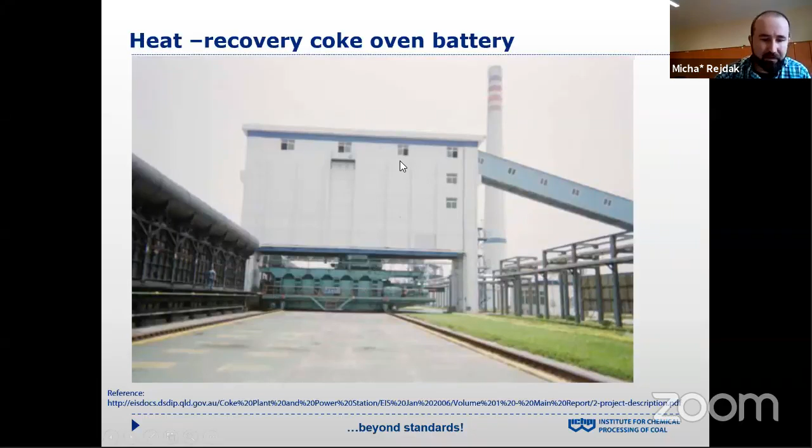Here we can see the photo. There are heat recovery ovens under construction. So this is the internal chamber of the heat recovery coke oven.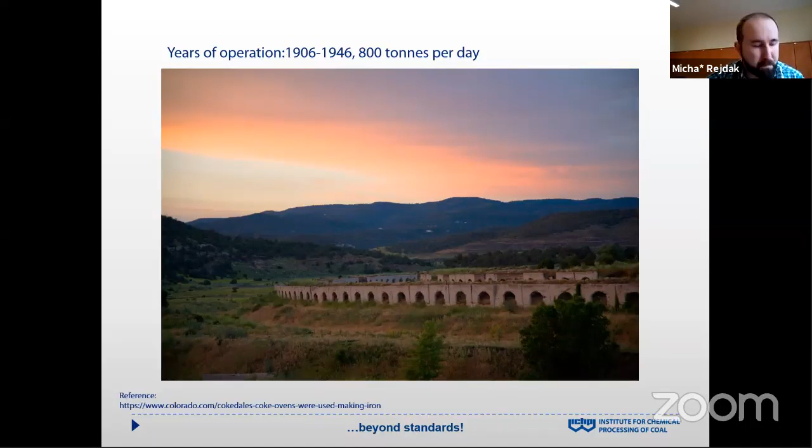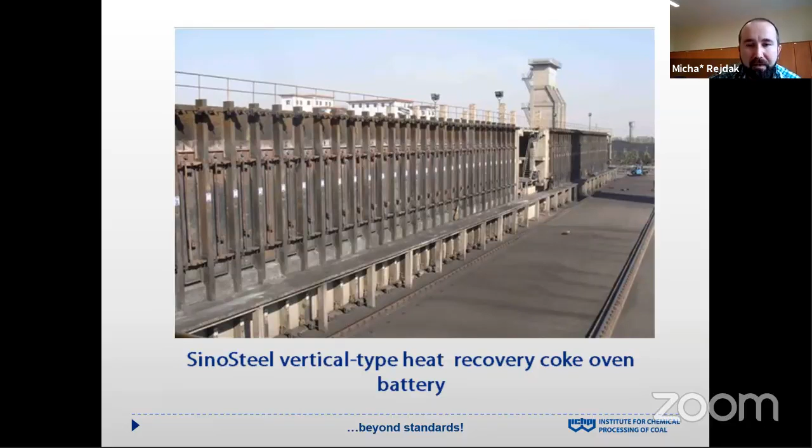As a rule, non-recovery batteries are arranged horizontally, but they also exist vertically. This is the example of a vertical type heat recovery coke oven battery located in China.

For heat recovery ovens, we have a hybrid heat transfer case. The raw coke oven gas released from the coal blend located in the coke oven chamber is burned directly above the coal charge with an insufficient amount of air. Air enters the chamber through holes in the chamber door. The hydraulic system of the battery operates under negative pressure, which allows it to suck the air and eliminate emissions from the oven. The partially burned gas goes through downcomers to the bottom flues.

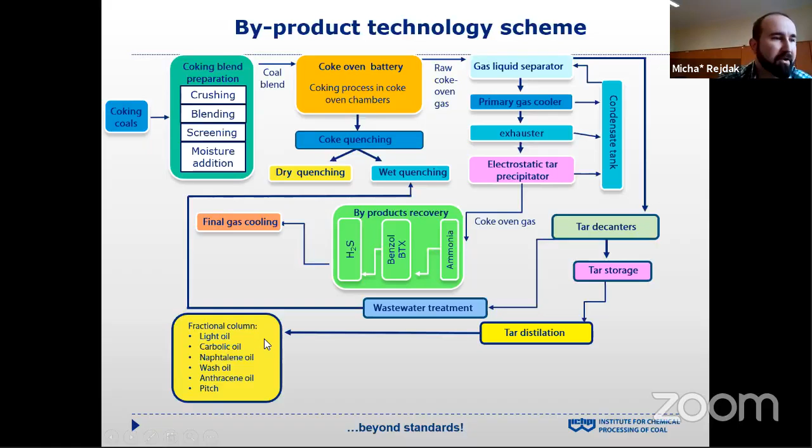In general, the technology of coal preparation in heat recovery coke making is similar to that for byproduct coke making. The only difference is, apart from coke, the coke oven battery produces waste gases. These waste gases are used in a steam boiler. The generated steam is directed to a turbine connected to an electricity generator, and the resulting electricity feeds the power grid.

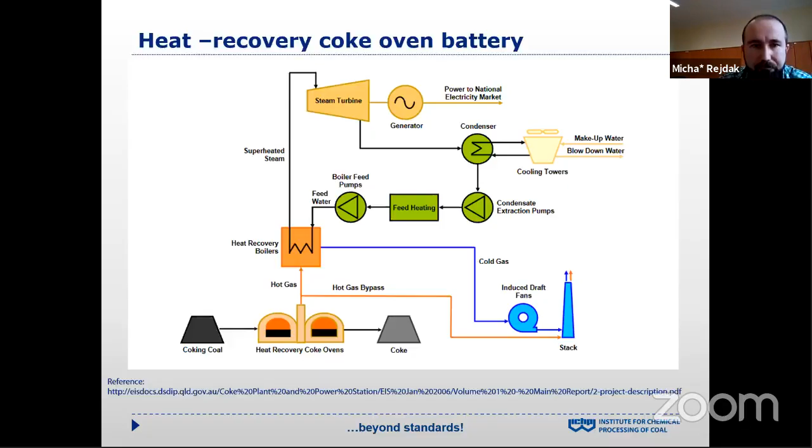From which raw materials can we produce coke? In relation to the coking process, coals can be classified into two categories: non-coking coals and coking coals. As I mentioned before, coking coals are bituminous coals with an average coalification degree, and they pass through a plastic state during heating without air access. Volatile matter in such coals is about 16 to 35%.

Many parameters can be evaluated to assess the suitability of coal for the coking process, and based on knowledge of these parameters, recipes of coke blends are established. The most commonly assessed parameters are those of proximate analysis: moisture content, ash content, volatile matter content, fixed carbon, and the ash chemical composition - the oxide composition in the ash - because some oxides can act as catalysts of the carbon dioxide gasification reaction of coke.

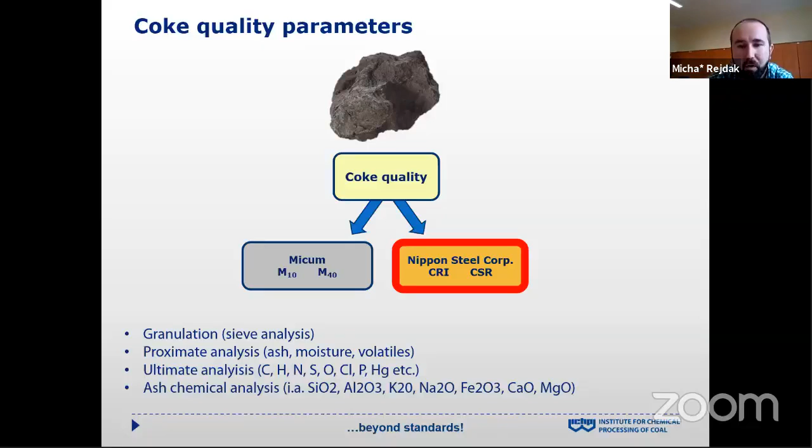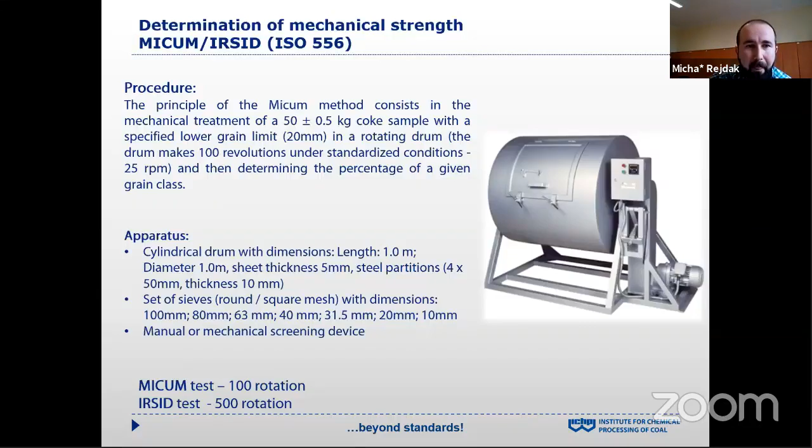The principle of determination of Micum or IRSID parameters is based on mechanical treatment of a coke sample with specific rotation in a rotating drum, and then assessing the mechanical strength. Micum test equals 100 rotations, while IRSID test has 500 rotations of the drum. The most frequently rated parameter is the abrasive index M10, which reflects the share of the test sample with a diameter of less than 10 millimeters after drumming.

The mechanical strength can be M40 or M80. It reflects the share of the test sample with a diameter greater than 40 or 80 millimeters after revolution of the drum. In general, for blast furnace processes, it is better to have a relatively low abrasive index and a relatively high mechanical strength.

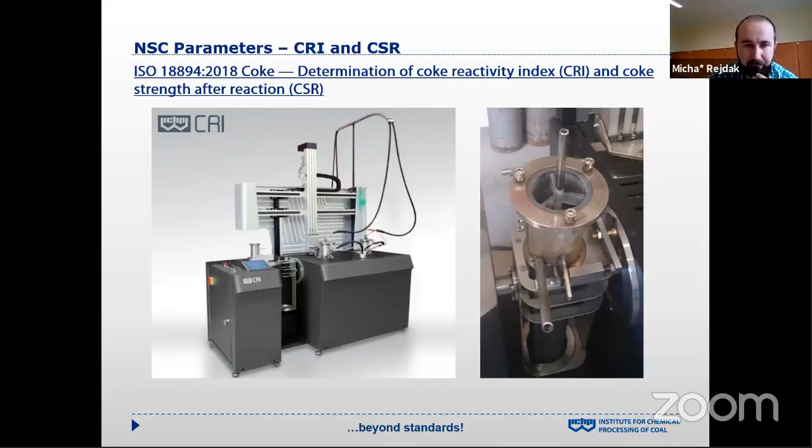The principle of the method is to gasify 200 grams of coke with proper grain size between 19 and 22.4 millimeters in an atmosphere of carbon dioxide at a temperature of 1100 degrees Celsius. The duration of the process is exactly 2 hours. The coke reactivity index CRI is calculated from the amount of weight loss, and then the coke sample after gasification is mechanically processed in a rotary drum under specific conditions - 600 revolutions at 20 revolutions per minute. The weight of grains with dimension above 10 millimeters is then determined to establish the CSR index.

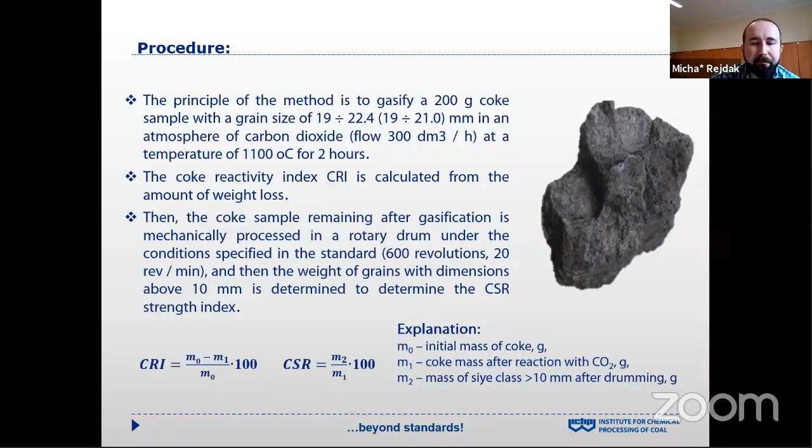As I mentioned before, when we have a higher working volume of the blast furnace, there is higher mass of the iron-bearing feed in general. So the coke needs to be stronger, with higher mechanical strength, to ensure proper permeability of the feed. And of course, it shouldn't degrade. When we have higher reactivity and lower coke strength after reaction, the coke is diminished too fast, and the operation effectiveness of the blast furnace is decreased.

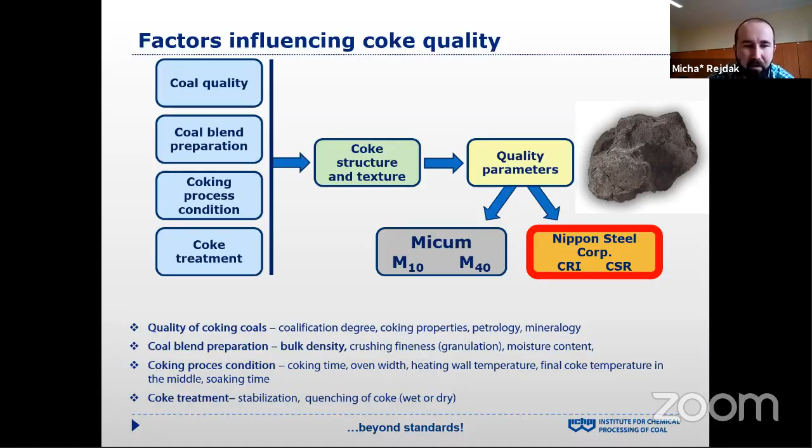Now for the conclusion. Coke is an essential raw material for the steelmaking process. Blast furnace process will remain the leading process in pig iron production within the next 30 years. The development of blast furnace technology will force the necessity to increase the economic quality and environmental effectiveness of coke production.

And of course, in order to reduce carbon dioxide emissions to the environment, coke-making technologies will develop methods for producing biocoke - coke based on coal and biomass blends. In blast furnace technology, there will be replacement of substitute fuels of fossil origin, like natural gas or pulverized coal injection, with renewable fuels such as hydrogen or biochar.

I mean pulverized, thermally treated biomass.